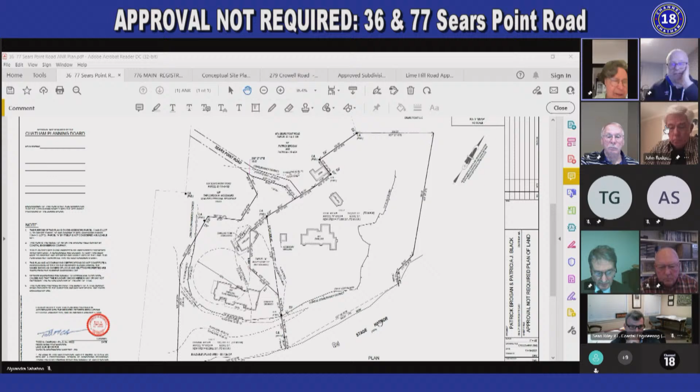I move to endorse it. Thank you, do I have a second to that motion? Roger Griffin will second that motion. Thank you, so let's go through our roll call vote.

Art Spruce, approve. Warren Chain, approved. Tom Gagan, approve. Bob Wirtschafter, approve. Roger Griffin, approve. And this is Catherine Hepburn, I approve that we endorse the ANR as presented.

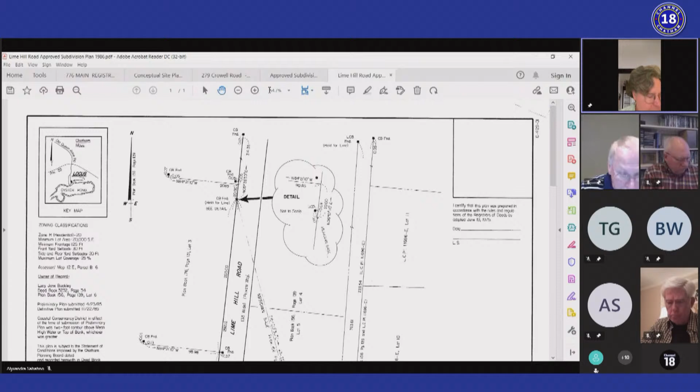Thank you, Mr. Ford. Thank you, Madam Chair, members of the board. Next item on the agenda is the release of covenant statement of conditions, regarding 202 Lime Hill Road. Again, do I have a presenter? Is Mr. Norcross with us tonight? Is Jamie connected?

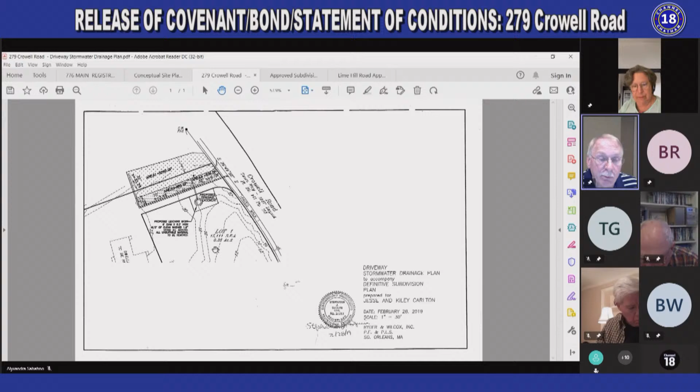That's all I have, Catherine. Okay, great, thank you Arthur. Warren Chain, comments, questions for Mr. Riley? Yeah, this is Warren Chain, it's just a point of clarification.

I wanted to be clear that the drawing which shows the proposed drainage easement with a leaching basin, that has not yet been installed—is that correct? Or in other words, the photographs we've seen of flooding did not occur after the leach basin was installed. Mr. Riley, would you like to answer Mr. Chain's question?

Mr. Riley, you may be muted, but I'd like you to answer Mr. Chain's question.

Well, we've somehow seemed to have lost Mr. Riley. I believe itself, I saw no evidence, and I was on the site that the leach basin had been put in. I just wanted to confirm it for the record. That's the only question I had.

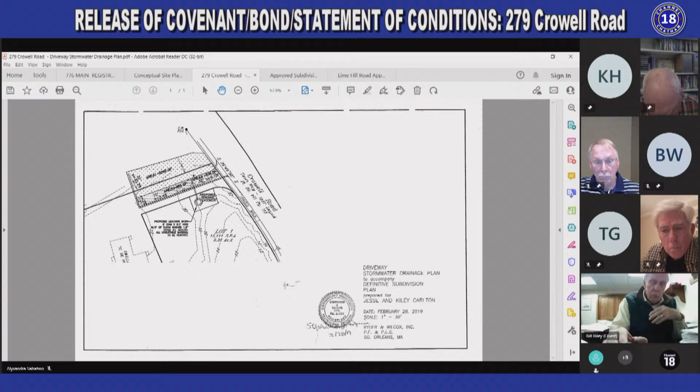And I just forwarded to Ally a picture my client sent me this afternoon. I apologize for the late notice, but it's showing the drainage that was installed this week or last week by Mr. Carlton after receiving notice from Neil about the flooding.

There are actually 2 pictures there. Ally, can you show the second picture too? So that's the drain that's placed exactly where Mr. Cole's picture showed water running from this property onto his.

And in my conversation with Mr. Carlton, he indicated that it was true there was some drainage from his property going onto Neil's property. He said those pictures were taken before the town had finished its work on Crowell Road, so the corner of Stepping Stones and Crowell Road was still dug up and not finished. The curb along that side of Crowell Road had not yet been fully installed.

And although we don't have a picture of it, Mr. Carlton said to me that he believed a significant percentage of the water shown in Neil's pictures that were sent to Ally actually came from Crowell Road, not his property, but acknowledging that no water is supposed to go from his property onto Mr. Cole's. He had his landscaper install this drain, and there's a leaching catch basin below with stone around it. So we're going to get a statement from the landscaper exactly what he installed there, and we'll submit that to Ally as soon as we have it.

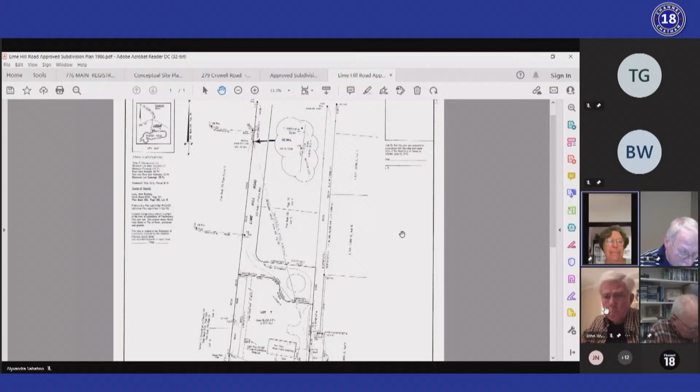So to present this matter—it's an old housekeeping matter. I recently represented a client who purchased lot 7 that's referenced on this statement of conditions, and the underlying covenants were released way back when, dating back to 1986. It looks like the town also tried to release the statement of conditions back in 1996, but what was on file with the town was never recorded, and it didn't include the recording information for the statements at the registry. So we're just looking to have this cleaned up and recorded, so it's clear for now and clear for the future.

Okay, this is Catherine. Thank you, Jamie. So as I understand it, if I could just reiterate based on the staff report, condition number 3 was approved by the planning board in 1996, but that is not on record with the Registry of Deeds. Is that correct? That's correct. There was a copy in the file, but for whatever reason, it never got recorded, and there's no original that anyone could locate.

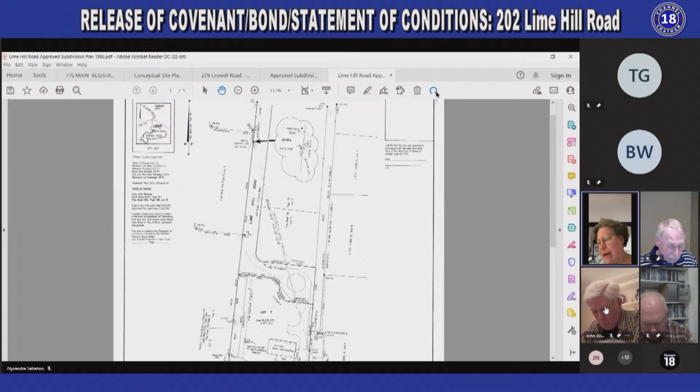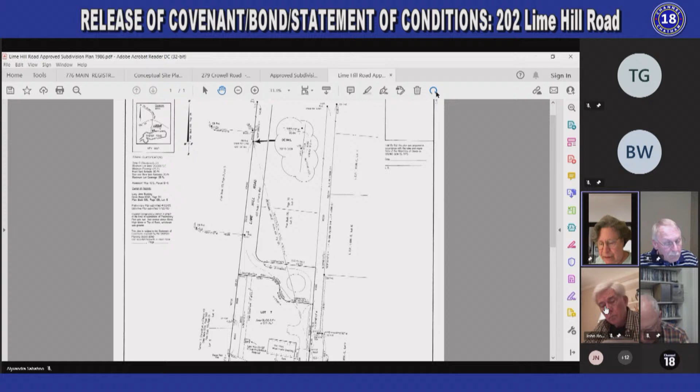But then in the other cases, let me just see. For the other conditions, we don't have as-built plans, but the staff comment is, to the best of staff's knowledge, for example, all runoff is disposed within the panhandle portion of lot 8. However, the file does not contain an as-built plan. And then also regarding the conveyance of either lot 7 or 8, the release of this condition was approved by the planning.

So this is condition number 3, so that we do have on file. So again, our vote, we could approve the release of number 3, which apparently has already been approved and is purely a housekeeping matter, or we could approve the full release of the full statement of conditions, without the as-built plans as it stands. So with that being said, I think I've summarized it clearly. Can I have comments or questions for Mr. Norcross?

Let's go through the board. Art Spruce. Art Spruce, I guess the question is if there was a condition asking for an as-built plan, we should receive that condition. I don't have any problem in going ahead and voting a release of this upon receipt of that as-built plan.

All right. And Art, what would you think about what I've suggested, that we could vote to release condition number 3, which apparently has already been released but just not recorded, and then the release of the other conditions would be pending the receipt of as-built plans, which could be reviewed by the board, or we could give that to staff review.

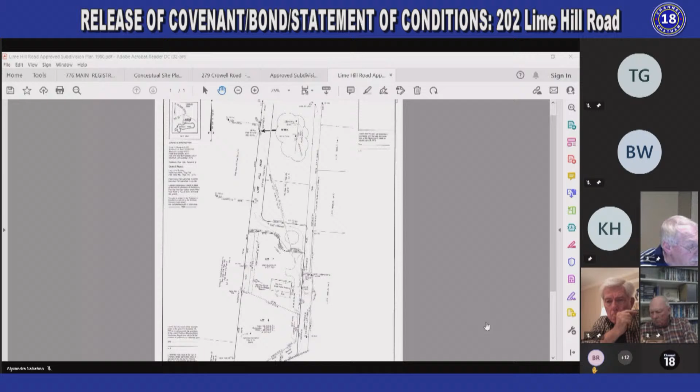Having a plan done today that purports to show it as it was 20-some years ago, I think deficiencies might have been created in the interim that, I don't know who you would expect to correct those deficiencies if in fact they exist.

The fact that the covenant was released meant that sometime in 1987 or whatever year it was released, according to the tradition of the planning board at that time, a member of the planning board, typically Skip Kendrick, would go out and look at the work, and then he would go back and report to the board that the work had been done in accordance with the plan submitted, and that's how the covenant would get released.

I can understand why staff would think, oh, it'd really be a great idea to have one, but it imposes, presumably, if you're going to ask Mr. Norcross's client to pay for it, a burden on him that is completely unanticipated and candidly unwarranted. And then what are you going to do if the plan shows deficiencies? Who's going to correct those? Would you expect Mr. Norcross's clients to correct them when the road's been there for 30 years, or more than 30 years, and the covenant was released?

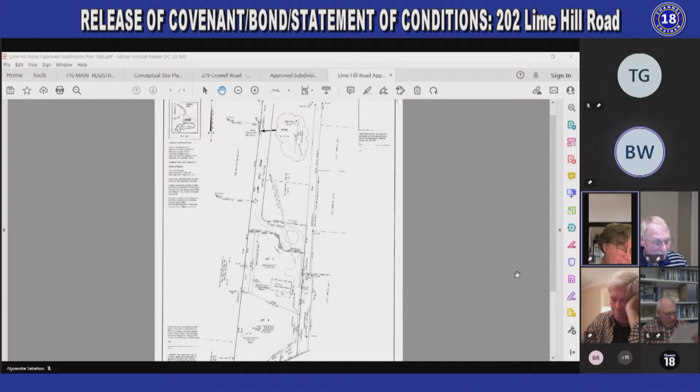Tom Gagan: Madam Chair, I have nothing to add to what's been discussed so far. Thank you, Tom. Bob Wirtschafter? Yes, I think that we should just do what was asked, and that's release the third provision and let everybody go home and be happy and make this simple. Roger Griffin? I feel we could release condition number 3 tonight. We could at least accomplish that.

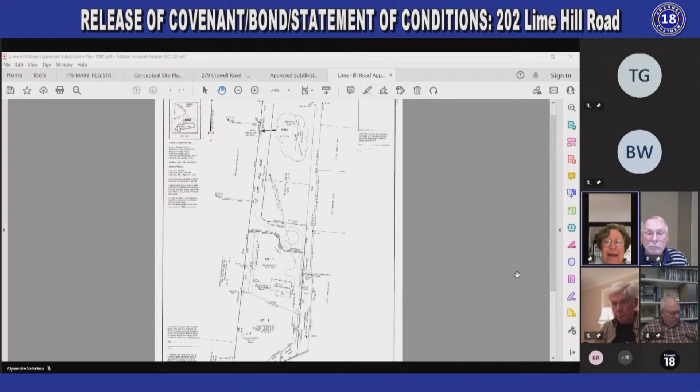No other comments. Great. So what I'm hearing from the board is that most of the board is completely comfortable releasing condition number 3, but I am hearing that we don't want to act on the other conditions. So that's my assessment. What I would ask for is a motion that we approve the release of condition number 3, which essentially has already been released by a previous planning board, but just not properly recorded in the Registry of Deeds. Tonight we will be voting to approve confirmation of the release of condition number 3 in this statement of conditions. So do I have a motion to that effect?

Art Spurl: I'll make that motion. Do I have a second to that motion? Roger Griffin: Tom Gagan will second that motion. Okay, great. So let's do our roll call vote.

Art Spurl: approve. Warren Chain: I'm opposed. I'd be in favor of releasing all the conditions. Would you, okay. All right. I'm just going to comment that in essence, that also means you would allow the release of condition number 3. It's just that you would vote to include all the conditions.

Madam Chair, if I may, I guess not to drag this out any longer, so to avoid this coming back a few years from now for Lot 8, what would folks like to see in terms of releasing all 3? So you don't have to deal with this again in the future. All right, so we're going to hold on the vote for a moment, and I'll ask for comments in response to Mr. Norcross's question.

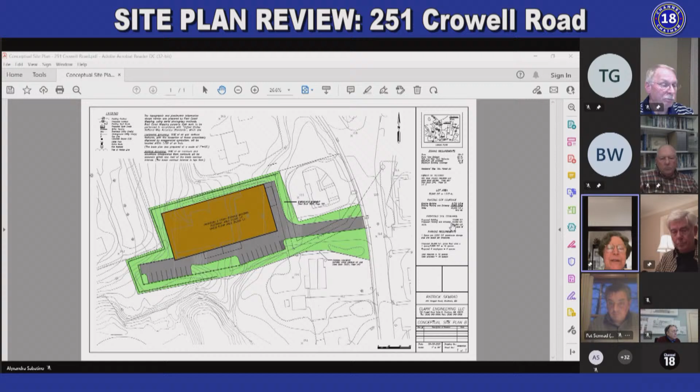So let's do our roll call vote. Art Sprue? Art Sprue, approve. Warren Chain? Warren Chain, approve. Tom Gagan? Tom Gagan, approve. Bob Wirtschafter? Bob Wirtschafter? Bob Wirtschafter, approve, sorry. Okay, no, that's okay.

Roger Griffin? Roger Griffin, approve. And this is Catherine Halpern, I approve that we accept this pre-application and that we organize a site visit and also a public hearing for this for the formal application.

All right, great, so let's go to our next item on the agenda, and we are past the time. It's 5:45, but this is our community input session. Again, I'm just going to ask anyone who's not speaking, would you kindly mute your microphones and disable your video, except for planning board members who should keep their videos on.

And we'll move into our community input session, and this is regarding the West Chatham Neighborhood Center draft zoning bylaw amendment. And I just want to review for everyone a little bit of the history of what's going on here. Back in 2003, the comprehensive plan for the town of Chatham was unanimously approved at annual town meeting by the citizens of Chatham. And since that comprehensive plan was approved, it has been one of the mandates given to the planning board to implement certain aspects of that comprehensive plan.

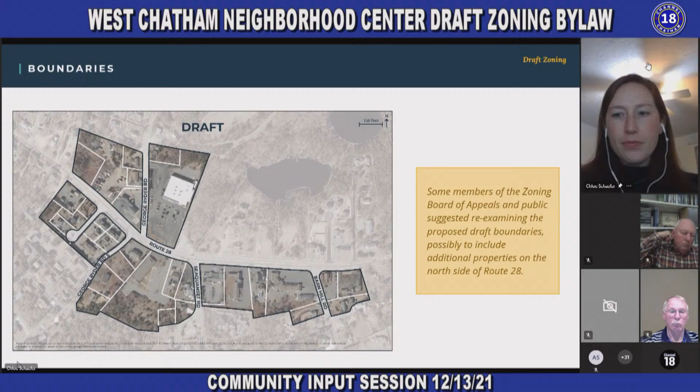Next, in terms of the review framework, the current draft zoning follows the existing development review framework, and any requirements regarding going to the HBDC or the Zoning Board of Appeals would remain as they are today. Additionally, changes in zoning may produce non-conforming properties, but as always, those would be allowed to continue as is, and there are some specific provisions within the zoning allowing them to change.

Next, the West Chatham Neighborhood Center draft zoning breaks the area into three different zones. The first is Zone A1, the area within 100 feet of the Route 28 right-of-way for lots with frontage on Route 28. Zone A2 is the area beyond 100 feet of the Route 28 right-of-way for lots with frontage on Route 28, shown in teal. Lots that do not have frontage on Route 28 are shown in navy, and that is Zone B. The reason for splitting this into zones is that there are standards and regulations focused along Zone A1 to provide a more active and pedestrian-friendly streetscape along Route 28 in this neighborhood center.

Next are the lot standards. These remain unchanged from the current zoning.

This relates to the minimum lot size, minimum lot frontage, as well as maximum lot coverage. However, there are significant changes in the draft zoning with regards to setbacks compared to the existing zoning.

This is for the Zone A1 setbacks. There's a minimum road setback of 10 feet, as well as a maximum road setback of 20 feet for a primary building. Parking also has to be located at least 10 feet behind the primary building facade. The intention of these setbacks is really to help bring buildings closer to the roadway and move the parking further back so it doesn't have as much visual impact on the roadway, to help create a more engaging streetscape that can encourage greater pedestrian activity.

In Zone A2, which is those areas beyond 100 feet of Route 28 for parcels that front it, there's a minimum setback of 10 feet, but there isn't a maximum setback, understanding that in many cases these buildings will already be located farther back from the roadway, or their visual impact may be buffered by the buildings in Zone A1. However, the parking setback is 30 feet, a bit deeper than the existing zoning, which can allow for a deeper buffer to help minimize visual impact should parking be located near a roadway.

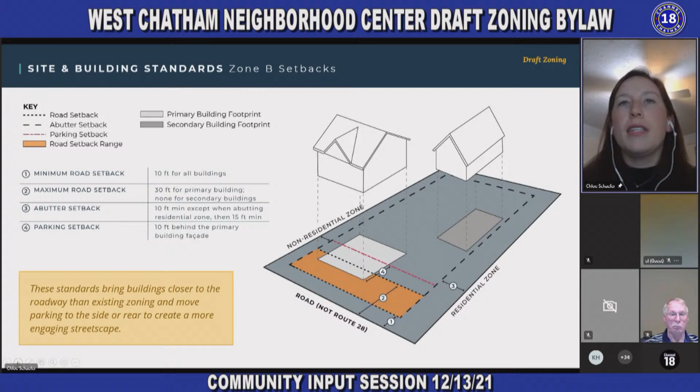In terms of the Zone B setbacks, these also have a minimum setback of 10 feet, again bringing buildings closer to the roadway, but there is a little more flexibility with a maximum road setback for the primary building of 30 feet. But the parking still needs to be located at least 10 feet behind the primary building facade, again to help create that pedestrian-friendly streetscape.

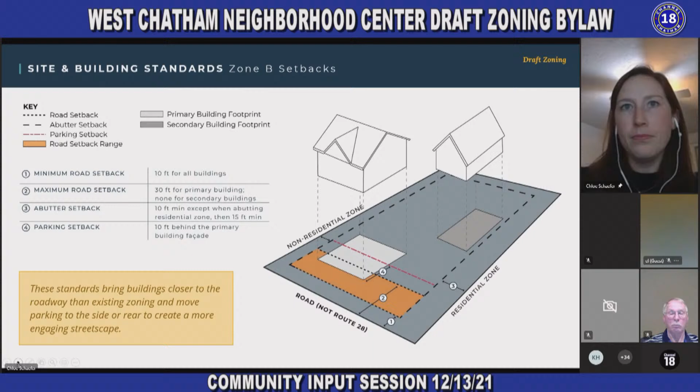The draft zoning also incorporates several new building form standards. One of these is building height. In the draft zoning, it currently allows up to 2 stories, not to exceed 30 feet, though there is potential for 2.5 stories if the development provides affordable housing units. For reference, currently 2.5 stories, not to exceed 30 feet, is what the GB3 allows.

Some of these other building form standards are relatively new concepts, but they're really meant to help provide zoning that is more consistent with the design goals of the Historic Business District Commission and help align the two. They did provide some initial feedback on these building standards as well. Just digging into some of those a little bit.

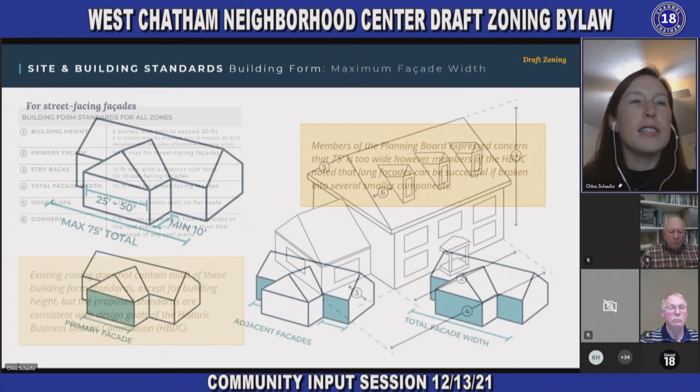First here is the maximum facade width for the street-facing portion of a building. This currently in the draft zoning allows a total facade width of up to 75 feet, though a single primary facade could only be up to 50 feet. This is to help keep buildings within the pedestrian scale along the street front.

The planning board has expressed some concerns that 75 feet might actually be too wide. But we did want to note that when presenting this to the Historic Business District Commission, they noted that perhaps what's less important is the total width of the building and more so the width of a single wall or a single facade, and that they've seen successful longer buildings that have been broken up into several smaller components.

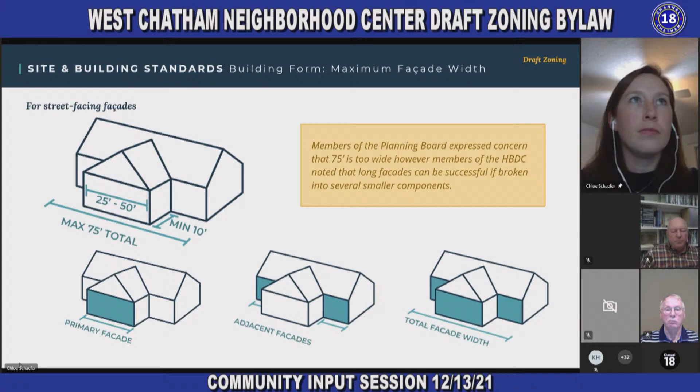Another new concept in this draft zoning is a maximum building footprint, per building. Multiple buildings are allowed in the zones and on the lots, but the smallest is in that A1 zone, again with the smaller character helping to contribute to a more pedestrian-scale and pedestrian-friendly environment along Route 28, at 3,000 square feet maximum.

Zone B is 4,000 square feet. And then Zone A2, again that portion behind Zone A1, is the largest at 5,000 square feet, understanding that the visual impacts of those larger buildings would likely be minimized by the buildings in the Zone A1 district. Originally, in one of the earlier versions of the draft zoning, the Zone A2 building footprint maximum was actually set at 7,000 square feet, though the planning board felt that was too large, and so it was reduced.

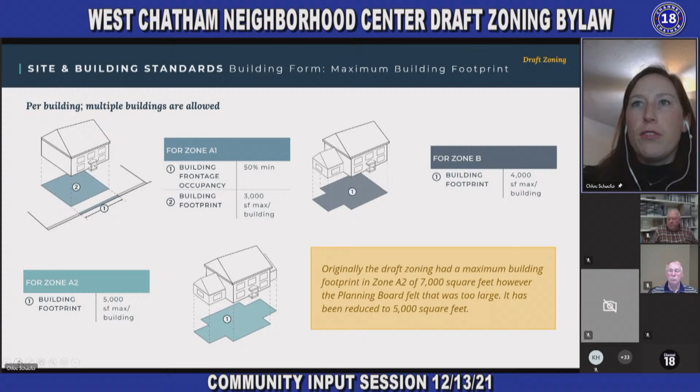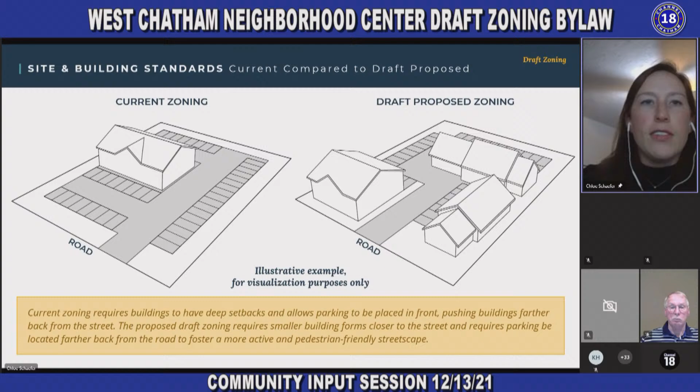Just to provide a visual example, this is illustrative, showing some core differences in setbacks between the current zoning and the draft proposed zoning. Currently, the GB3 zoning has relatively deep setbacks for buildings, and the parking is actually shallower, so parking often winds up in front of buildings along the street. Whereas in the draft proposed zoning, the setbacks, site, and building standards work to bring buildings closer to the roadway and minimize the visual impact of parking along the street, helping create a more active and engaged streetscape.

The draft zoning includes specific parking requirements and access standards. One new thing is that there are not only minimum parking requirements but also maximum parking requirements, which is best practice in parking management to encourage efficient use of land. The maximum parking requirements here generally align with what is currently the minimum in the area, and the minimum is reduced. This is because of the opportunity for creating more of a mix of uses in this area, creating more concentration opportunities for shared parking and more opportunities for walkability.

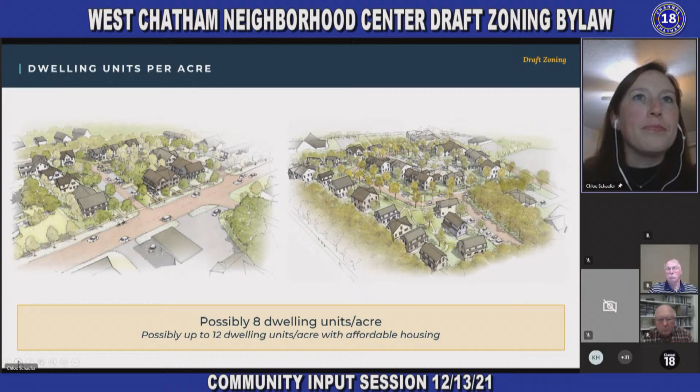Lastly, wanted to go back to some of the key goals the draft zoning is attempting to help with: enhancing and preserving community character, promoting pedestrian activity—those two especially coming to light with the different setbacks, building form, and site standards—and allowing for more housing opportunities and types through potentially greater density as well as different uses.

We're looking forward to hearing your feedback on all aspects of the draft zoning, but there were a few things we wanted to highlight. We'd love to hear any thoughts you have on the boundaries, potential facade width maximum, building footprint maximum, as well as uses, the density, and defining a mix of commercial and residential.